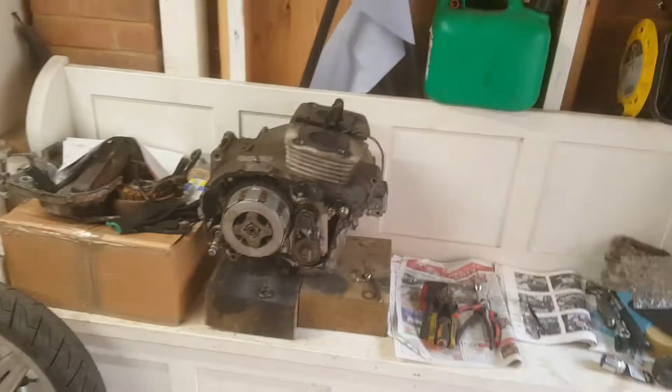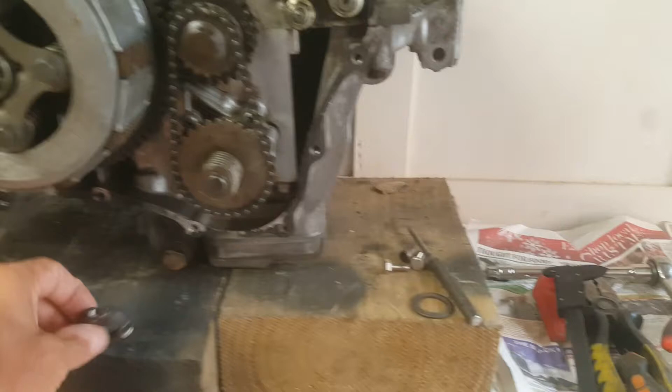So my challenge on this engine is, as I've said, I've ordered the full gasket set but it's not here yet. There's a bolt in the back of this clutch mechanism, which is actually another one of these, that I need a tool to tighten. And I don't have that.

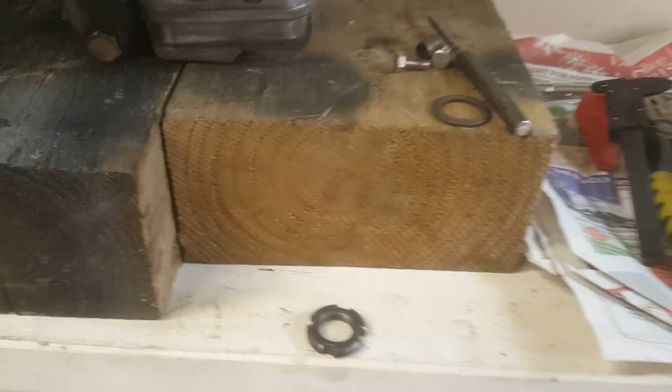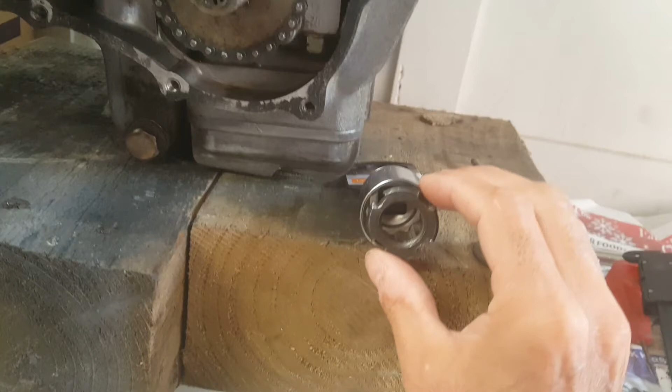So what I've done is I took the bolt, went down to my local DIY store, and tried offering up sockets which I thought potentially could be modified to fit.

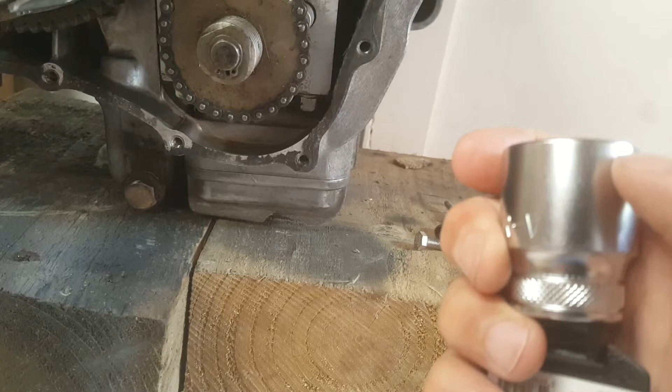So that looks to me to be about the right diameter. What I'm intending to do is to take this as a template, mark up some of this socket to cut out and remove, hopefully leaving the four prongs that will then allow me to use it on that. So that's my aim for today - to modify this to fit that.

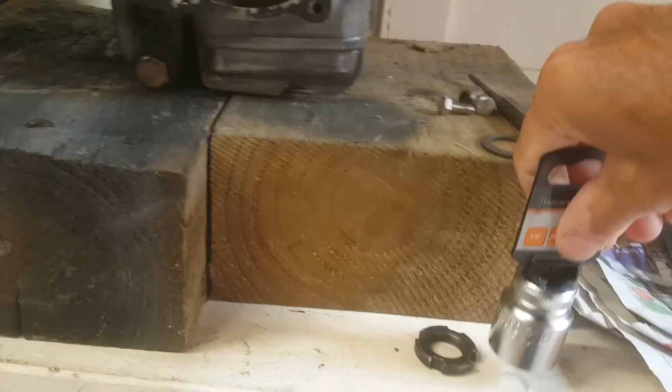So my first challenge is when I tried to mark directly onto the socket, the pen just wasn't visible. So I've put some tape around it so I can write on the tape - that should make things a lot easier. Okay, so that's marked up the bits I need to remove.

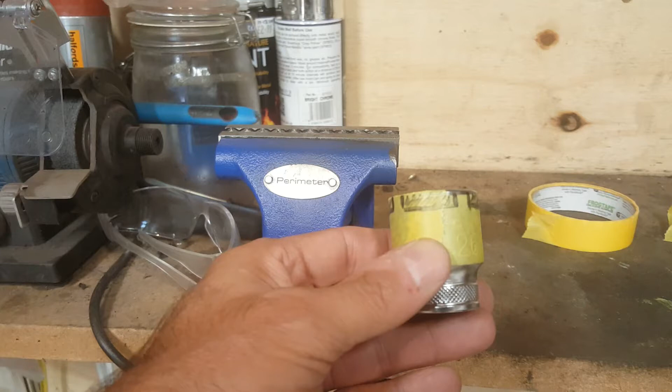And I'm thinking angle grinder. Do I do a cutting disc? Maybe cutting disc initially and then just grind it away in the middle. Although, what's the point? I'll just try grinding it straight away. Let's get the grinder out.

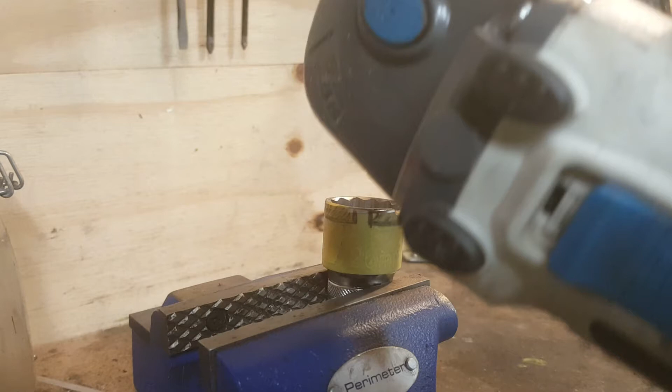Okay, so I was finding that particularly difficult because as I'm trying to grind this, it's jumping around no matter how hard I'm trying to hold it, and I don't think it's making a precise enough grind. So I'm going to go back to the cutting disc and try to cut down each of these. I think that's probably the way to start, and then I'll maybe go to the grinder. Maybe it's just me being stupid, but I'm going to try that - back to the cutting disc first, then the grinder.

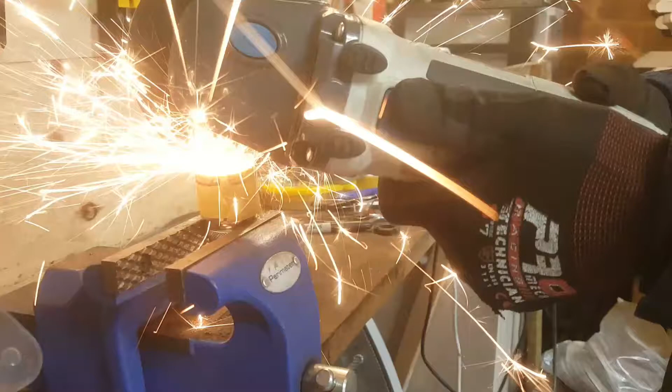Yeah, that's allowing me to make much more precise cuts. Good.

Okay, so with my newfound precision, which isn't great, I'm going to try now to cut across that line there. So if I put it in sideways and cut down, if I go gentle and careful, in theory I can cut between that and that. Let's try.

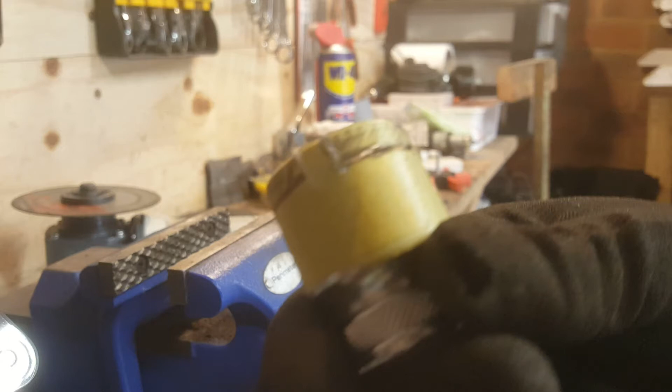Okay, so yes, but I couldn't go the full depth without beginning to damage the lugs. But that's a good start, so let me see if I can break that off now.

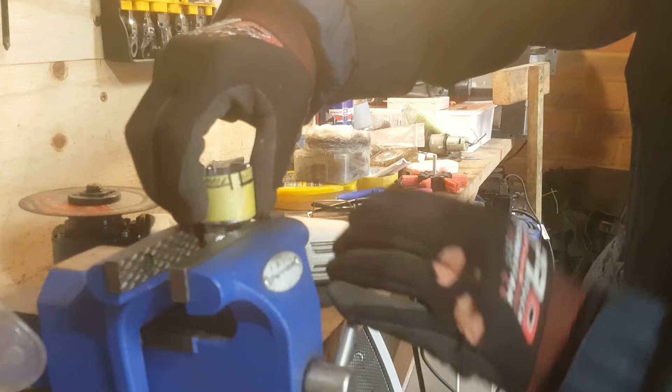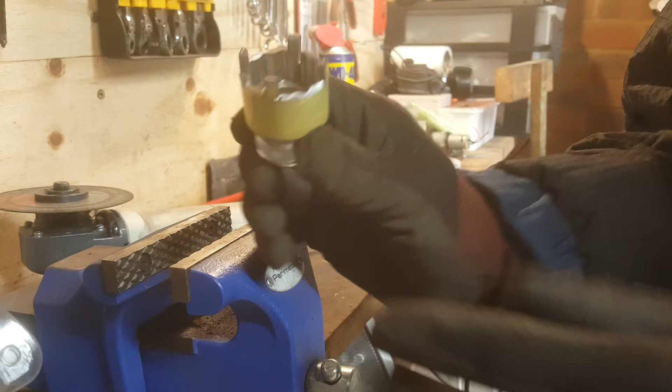Well, hey - that worked alright. Let's try that again. I don't mind admitting that angle grinder scares me, but I think I'm getting better. Looks like - oh, so I've just nicked into that one slightly, and that one, but all in all, that seems okay. Is it going to fit? Oh, look at that. First trial, okay - I am happy with that.

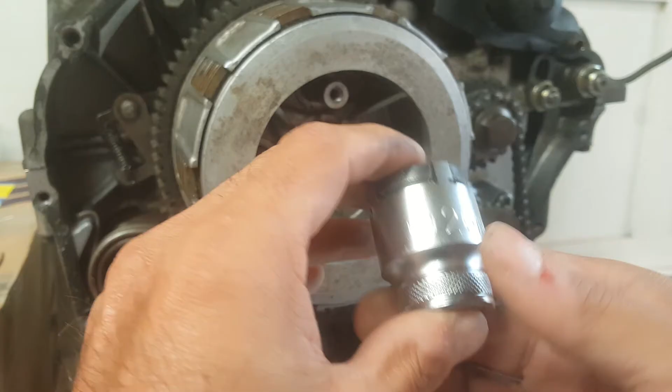But that fits this, which was the stunt double - that's the damaged old one. The question is, does it actually work in practice in situ? And that looks to me like it fits. Yep, that looks like it's going to do the job.

So now all I need to do is work out how to lock the basket and then get the correct torque on it. But no, I am happy with that - until it doesn't work, then I won't be happy.

Cool, well I'm not going to do that now. I'm now going to move on to the next job, which is on the Superdream, because I haven't got the gasket set for this, so I can't complete it anyway today.

Next thing on my agenda is, can I fit the turn signal indicators? I've got a set of fronts that I originally thought were rears - long story there. Each of them has got a single wire coming out, so the earth must be through that bolting point. I need to check that they actually light up, give them a little clean, find a power source and test each one. I've also got a set of little brackets which insert in there somehow and presumably bolt through. So that's what I've got.

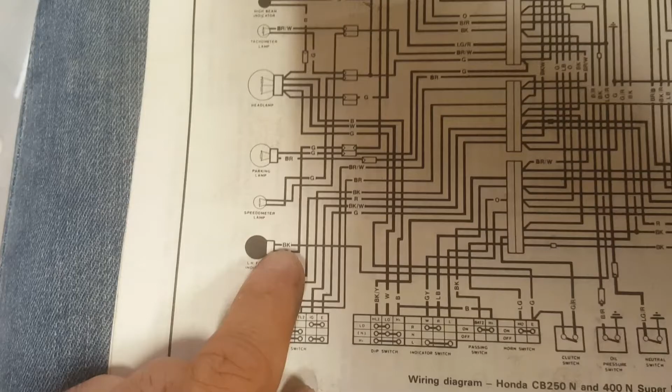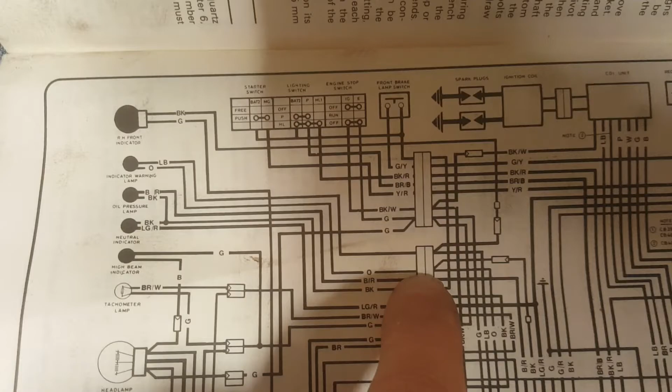When you take time studying this, it's obvious. This one says it should be a black cable at the indicator. Well, it is black, but if you follow this wire all the way back here and all the way up here, and then take it in there, that bit of cable doesn't tell you what colour it is. But if you come down to this connection and move across, it says that coming into this socket is orange. And if you look at the physical bike, oh look, there's an orange end connector.

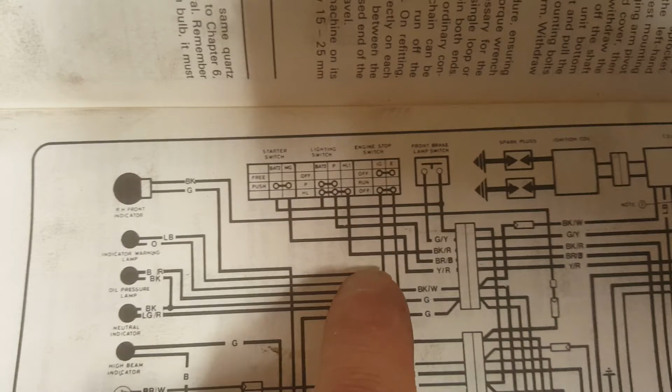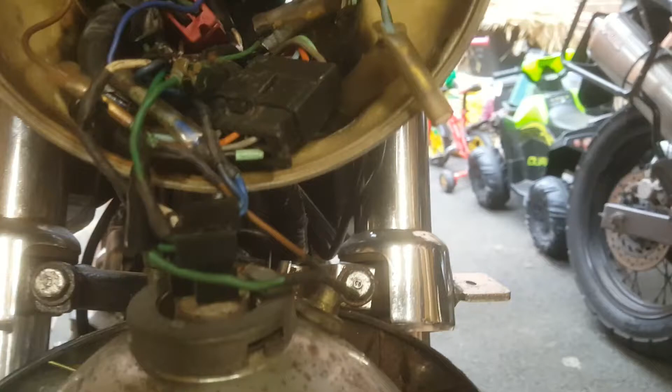Do exactly the same with this one - black comes in down here, it says it joins there, that's not mentioned, but if you follow this wire over and keep following it, it says light blue. And that'll be that one there then. Why on earth they didn't just make that orange and that light blue, I have no idea. I guess it was cheaper to just do these with straight black cables. They could have labelled it easier as well. So there's my left and right indicators - they were there staring at me all the time, I just didn't realise it.

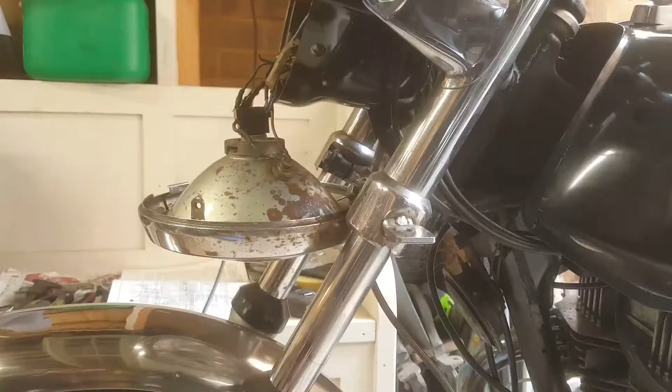Let's try testing that then. Okay, so I've got my two wires sorted out for the left and right indicator. I know it bolts on here. I've got my indicator. What more could possibly go wrong?

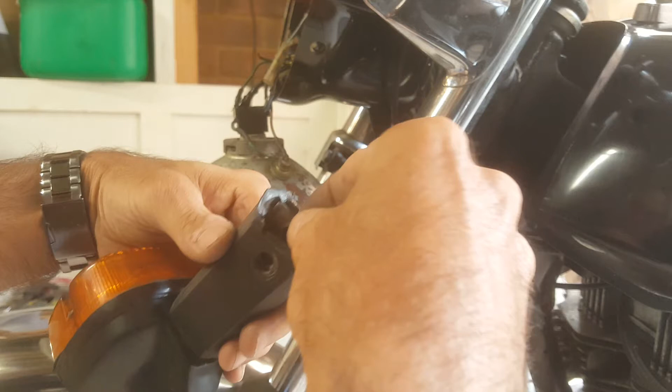Well, these brackets that I've got don't seem to fit inside the indicator. I can get them to partially go in, but if I force it any more, that's just going to break it. And that needs to go a lot further back. In fact, it's got to be that way up, isn't it, because there's the thread at the top. But there's no way that is going all the way inside that indicator. And even if I did get it all the way inside, these bolts with the standoffs that I've got cannot be right because they physically don't go through that hole.

Oh, hold on. Hold on a minute. Just noticed, live on camera, that's threaded. Well, if that's threaded, maybe that's my answer. Maybe these brackets are just not necessary. Let me continue to experiment.

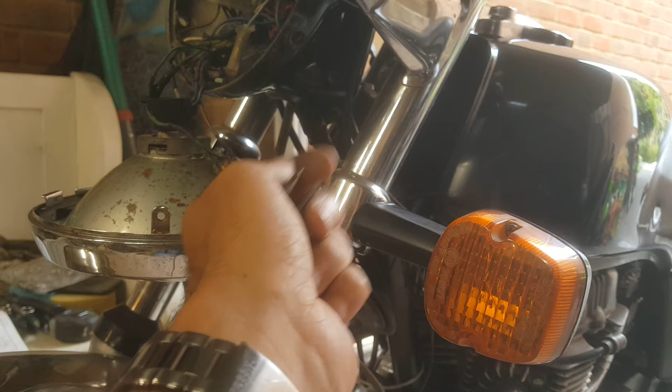Well, that's just bolted straight on, which means these brackets must have been for the rears. So I think I was supplied a front indicator and a rear bracket. Don't get me wrong, I'm still incredibly grateful for the donations I received, but I think that was my confusion. Alright, let me see if I can get them finished off.

There's the end result - a couple of front indicators, one side, the other. Turning signals working - rear one flashing, and rear one flashing. Cool, a big working set of indicators all around.

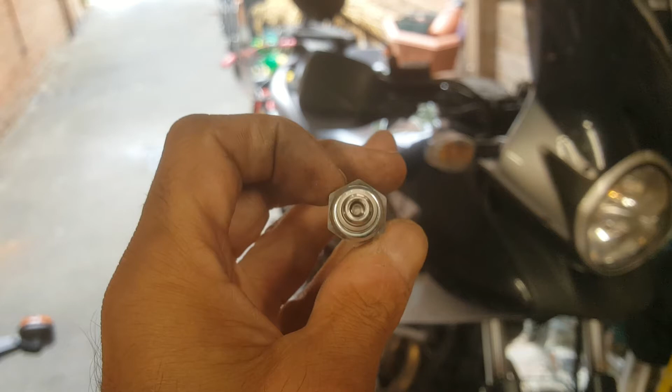Could really do with my bike being working properly this week. I'm going to switch to change the spark plugs on that. The first challenge I have is that the plugs for this bike are bloody tiny, so I'm going to need to find a spanner to actually fit them before I go any further.

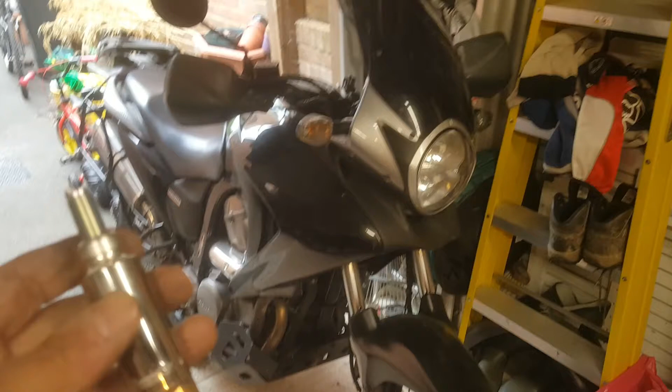And sometime later, there we are. Apparently it's a 10mm, so I needed to go and get a 10mm spark plug spanner, and I now have one.

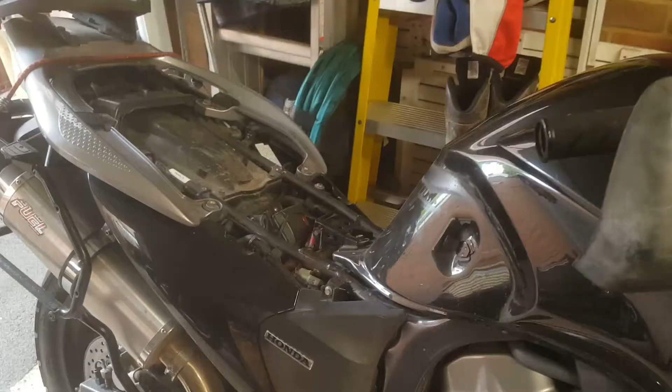Okay, let's carry on. So then of course I immediately start work on the bike. I then remember, oh yeah, the bike's got a toolkit. Never thought about that. The toolkit, of course, contained the right size plug spanner, so I didn't need to mess about and go and get one before I started.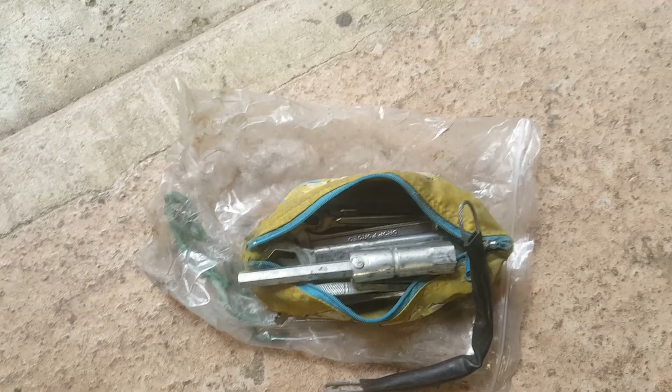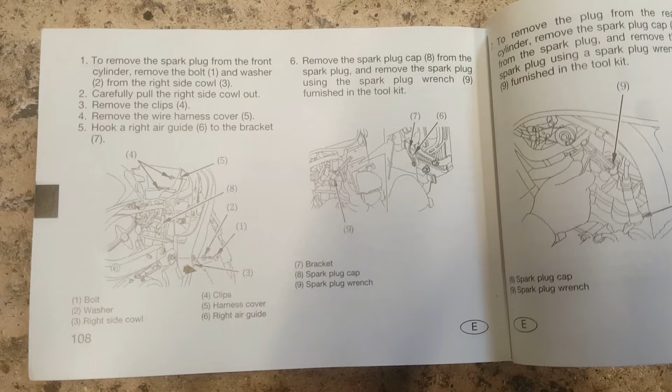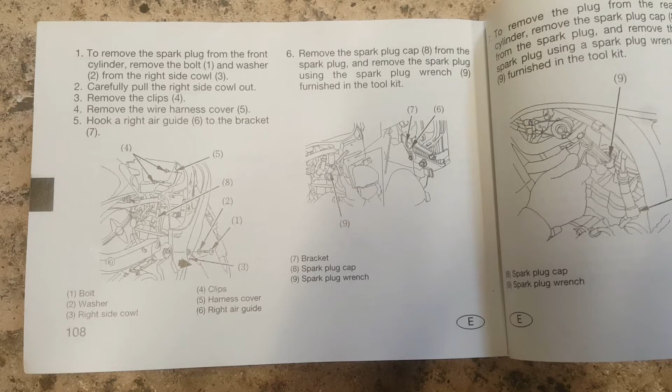So there's the instructions in the book for changing the spark plug, which is reasonably involved. I need to remove a cover, the right cowling, move some clips, move some harnesses. Let's see if I can follow these instructions, because they look not straightforward at the moment, but let's take them one step at a time.

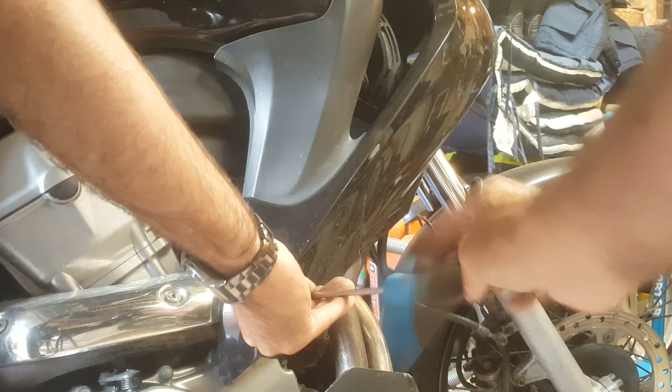Okay, the first thing it tells me to do is remove this bolt here. The next thing it tells me to do is to remove those two clips there and there. Now I've reached a sticking point because I've undone that and this, which makes this cowling really quite loose, but it's not going to come away yet, and there's several reasons for that.

One of which is that there's a screw located up inside there that's holding it in place, and the instructions aren't telling me to undo that screw, but I think I'm going to have to. I don't see a problem with removing it, so I'm going to undo that screw and see what that reveals, because it's talking about removing a wiring harness cover from here, but I don't know what it's talking about. I can't see any wiring harness cover here. Okay, I'm going to take that screw out.

So removing that other screw at the front allowed me to remove the whole side cowling. So that's away. I have no idea what wiring cover it was talking about up here, but it looks to me like I'm going to have to move this tank out of the way, because the tops of the cylinders - one's there, or maybe this is the cover they're talking about. There's the top of one spark plug there. I can't see the top of the other one though.

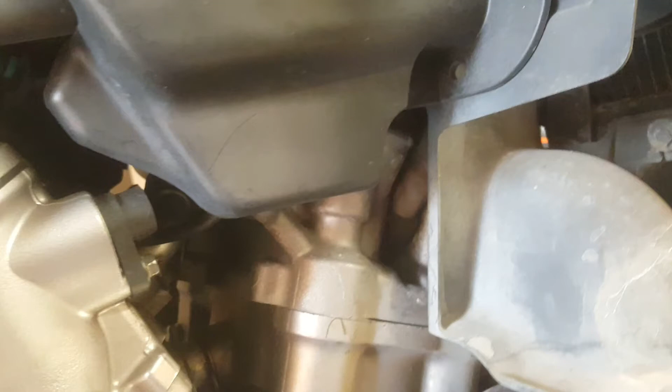We'll keep reading, but it's not looking very much like... I don't know, it just looks so cramped. I must have to move this tank. It doesn't say it, but logic tells me I'm going to have to.

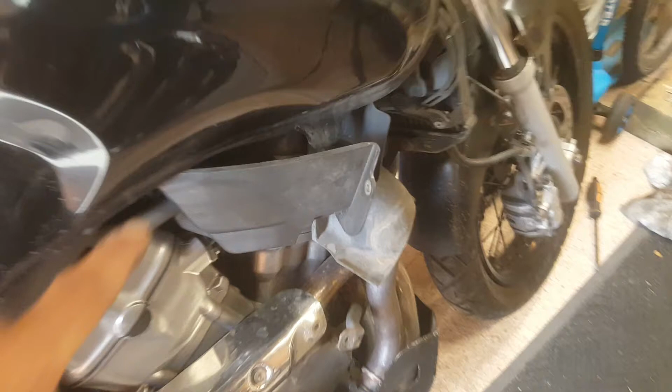This must have been what they were talking about being the wiring harness cover, because once I undo one bolt, it just comes out of there, and there's a whole load of cabling behind there. So that must be what they're referring to, which now means the only thing stopping me from getting access to that spark plug is this cover here, which looks like it should just unbolt. So, let me have a look at that.

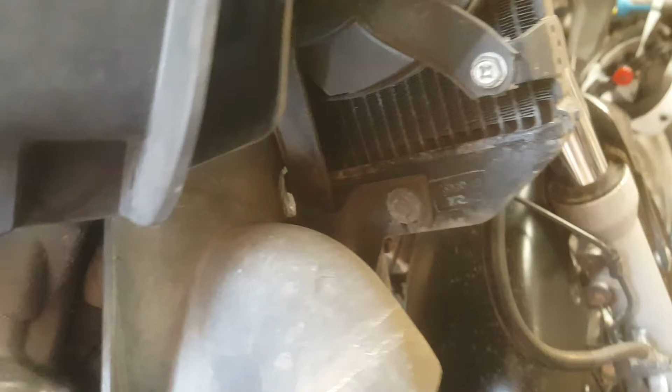Yeah, I've undone that bolt there. This lifts out the way, and that, I think, gives me enough clearance to get to that spark plug. Not simple, but I think I'm there, so let me try and get that out. And it's out.

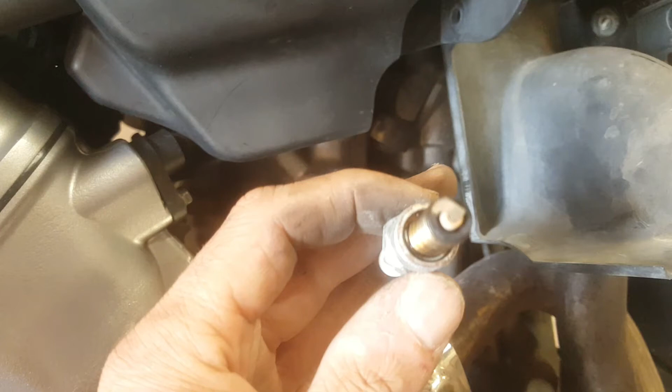Doesn't look too bad on the tip, but I don't know when it was last changed. I couldn't see that on the history. So let's put some new ones in.

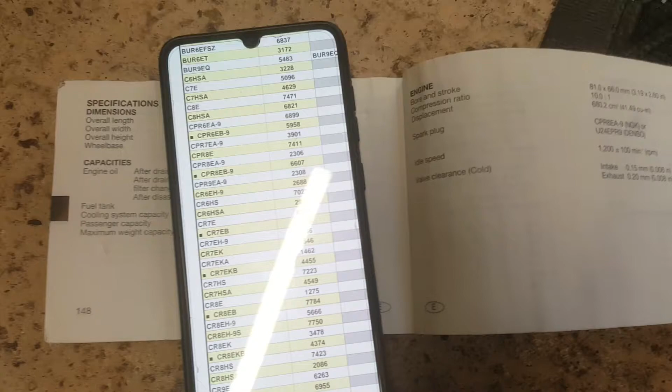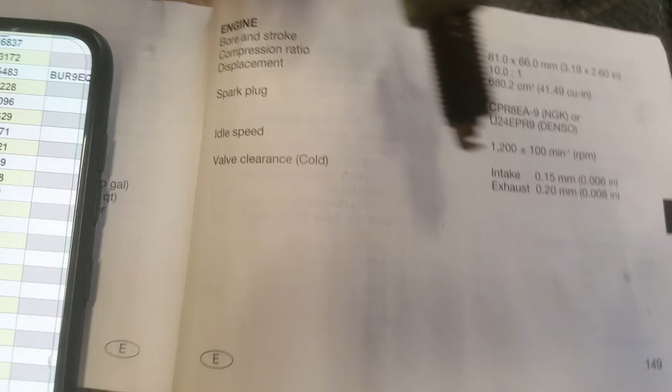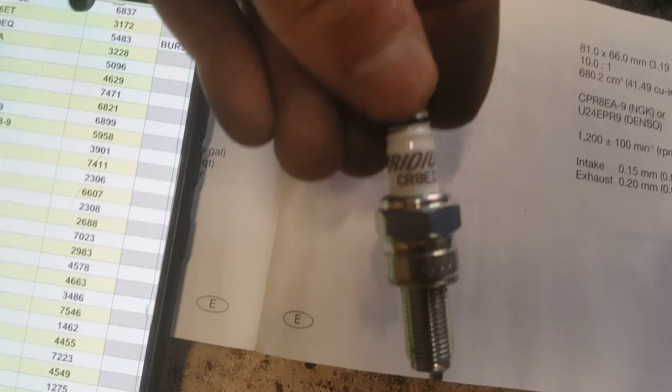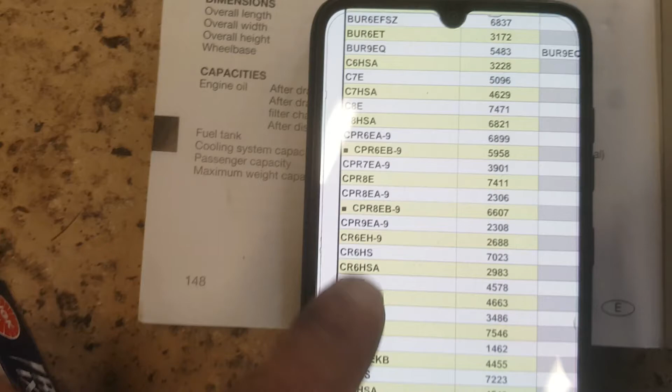So I've just had a momentary concern. The spark plugs here originally were CPR8EA9, which is precisely what the ones that have just come out are. But I bought these ones, having looked up for my bike, and they are CR8EIX, and I thought, are they right? But according to the NGK website, it shows the originals for my bike, and if we scroll across, that's now the upgrades. So yes, that is correct.

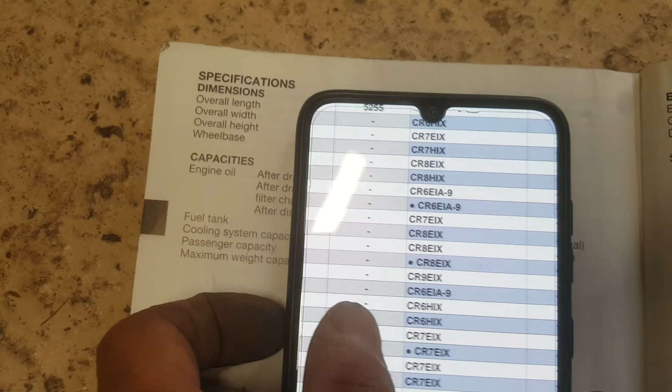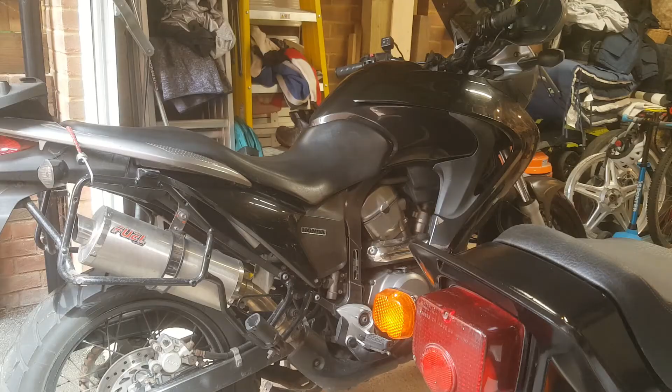Good. At least the other side is straightforward. It's just there. So that one is a very straightforward change. Good. Okay, that's the spark plugs changed.

Let's see if she wants to play.

Test ride time. Just got back from a nice run on the Transalp and it's running beautifully again. So it was always running, but at low revs it was just hesitating and it wasn't smooth. It's got the smoothness back, it's got all of its power. I'm very happy with that.